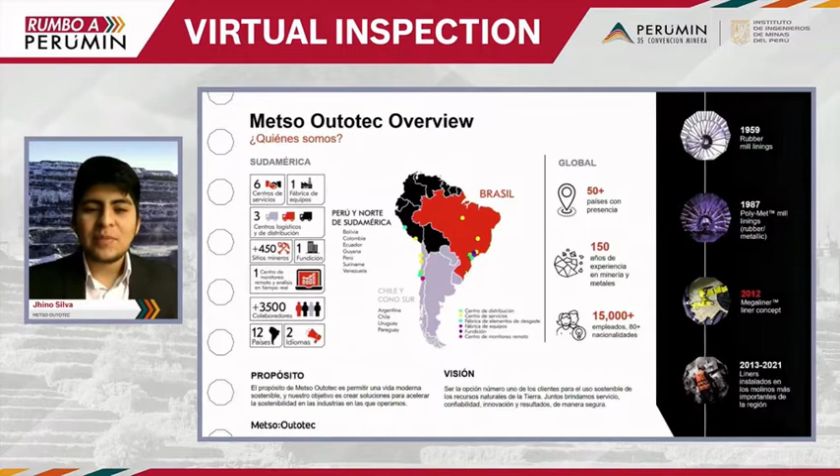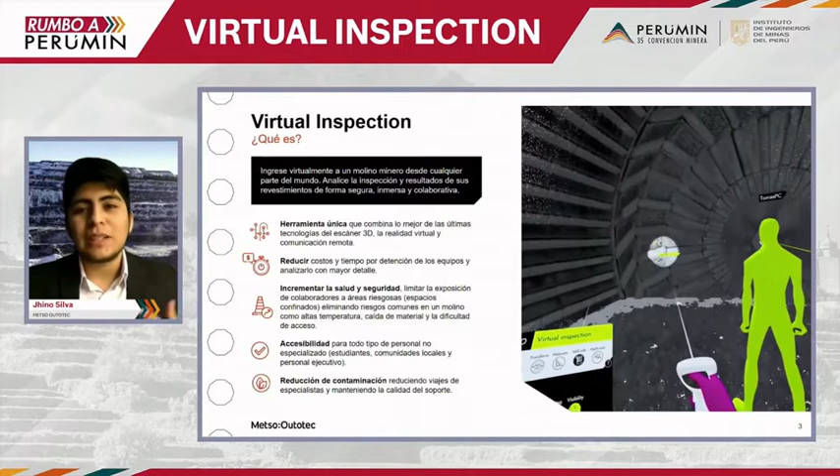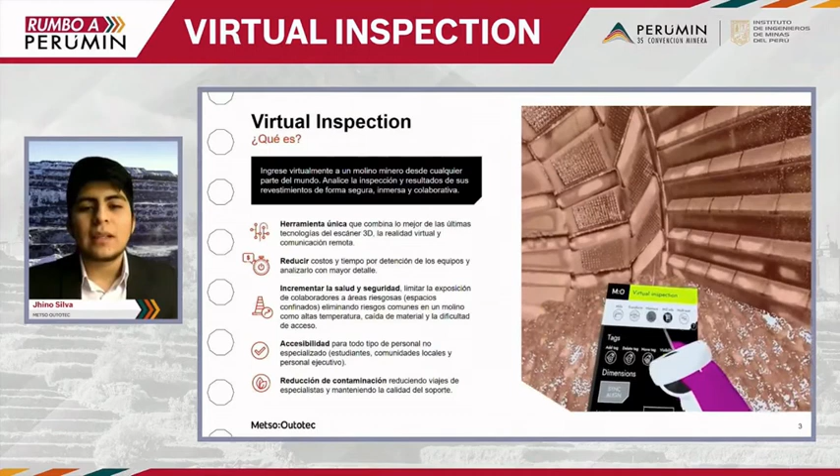Next, please. Now we're going to present to you a new technology, a new solution, which is virtual inspection, which will allow you to enter a mining mill remotely from any part of the world to perform inspection of linings in a secure, safe, immersive, and collaborative way. This combines the best from VR, 3D technology, and remote communication.

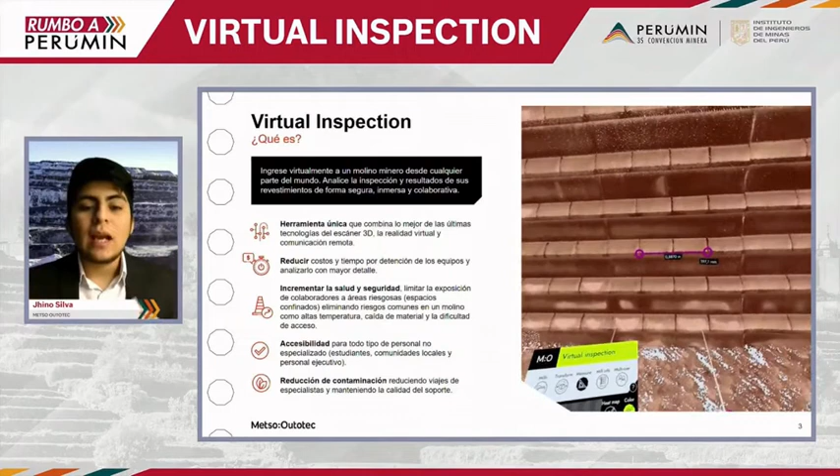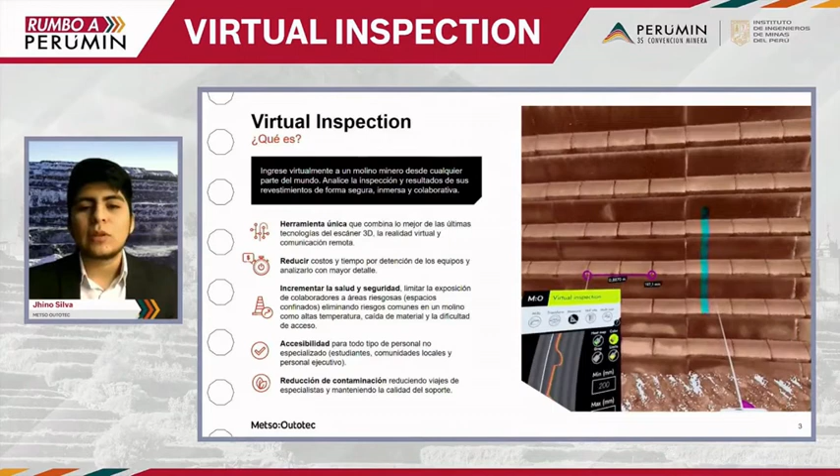So you'll be able to connect with a VR headset to a virtual room where you'll be immersed in a previously scanned mill, as you can see from the video. You'll be able to take measurements and crosscuts, and this also allows other collaborators with their own headsets to join our virtual room. So together, we can analyze the performance of all our linings.

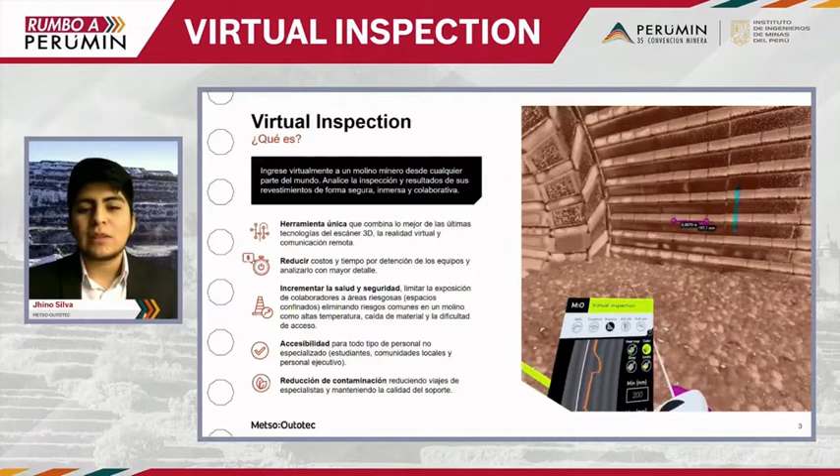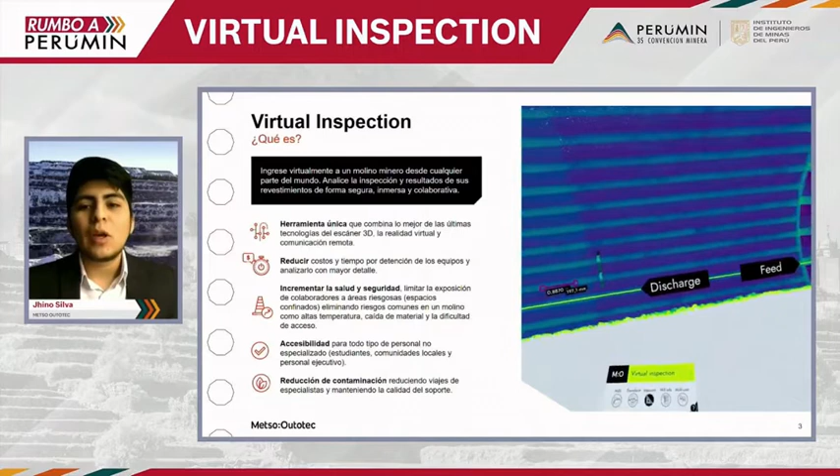So this brings multiple benefits, such as reducing cost and time for stoppage of equipment, where we know that in the region the cost of having a mill stopped is in a range of 20,000 to 150,000 euros per hour. So virtual inspection allows us to reduce costs of this kind of application by 20%,

and it will also allow us to increase health and safety, since we'll be limiting the exposure of our collaborators, and we're aiming for no collaborator to enter to inspect the mill, and later everyone can use a VR headset to perform inspection of the linings remotely and safely.

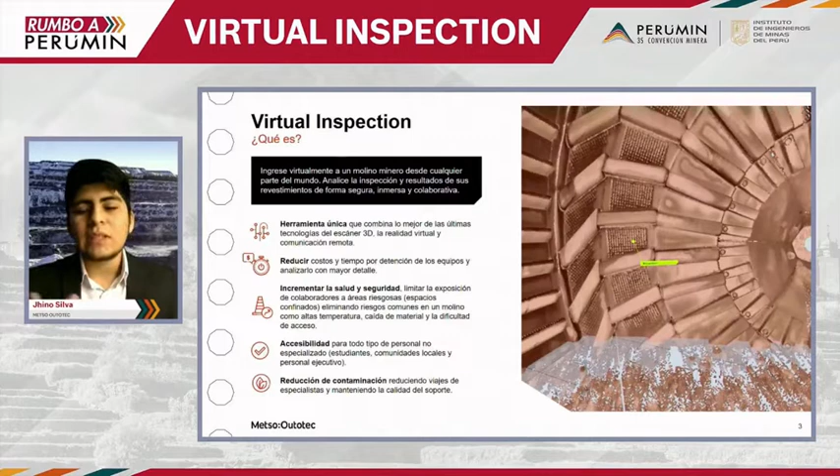This will allow accessibility even for all kinds of non-specialized staff, such as students, local communities, and executive staff, who seek to know what is being done in our mining plant. So this is a very easy and educational tool. We'll also be reducing pollution, since our global specialists will reduce their carbon footprint by avoiding transatlantic travel. Next, please.

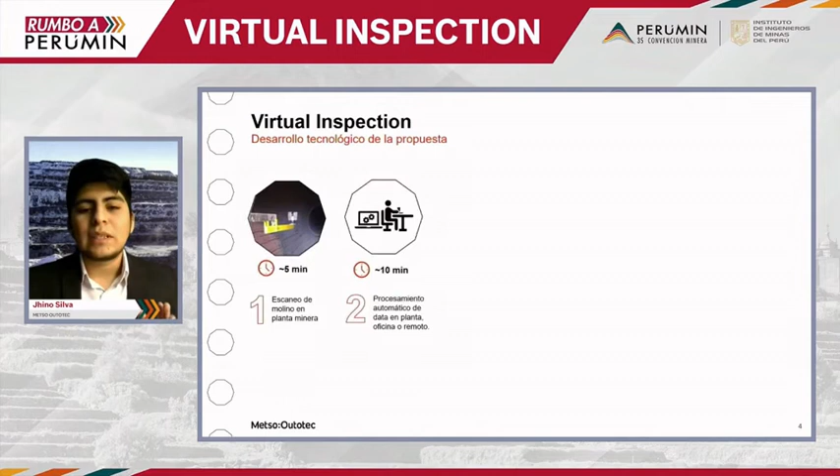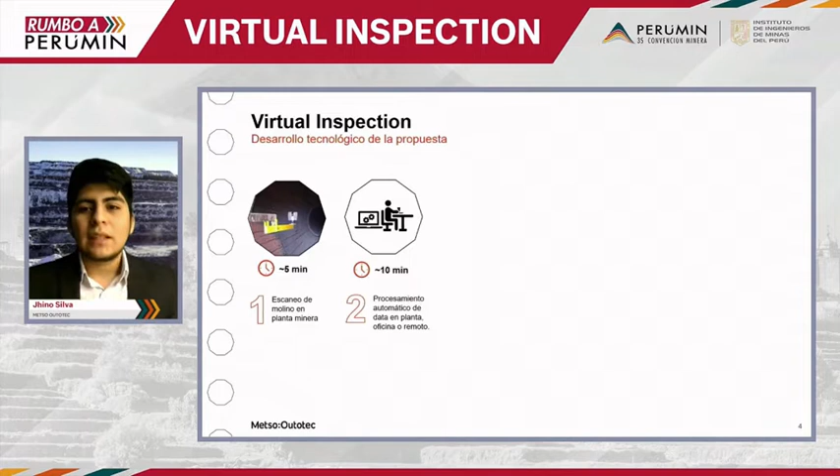As for the technological development of the proposal, we have two main steps. The first is to scan a mill at the mining plant, where we are not seeking to expose any staff. No staff will enter, since via a girder the sensor will be introduced to collect data, and the second step is processing.

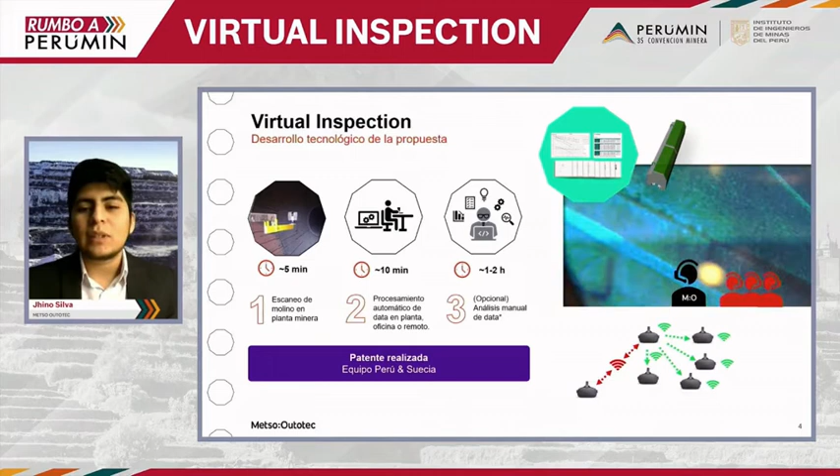There we'll be able to connect remotely, Metso staff as well as customers, in order to see this VR jointly and analyze the performance of our linings. This development is a patent between the Peru and Sweden team that I have the pleasure of belonging to.

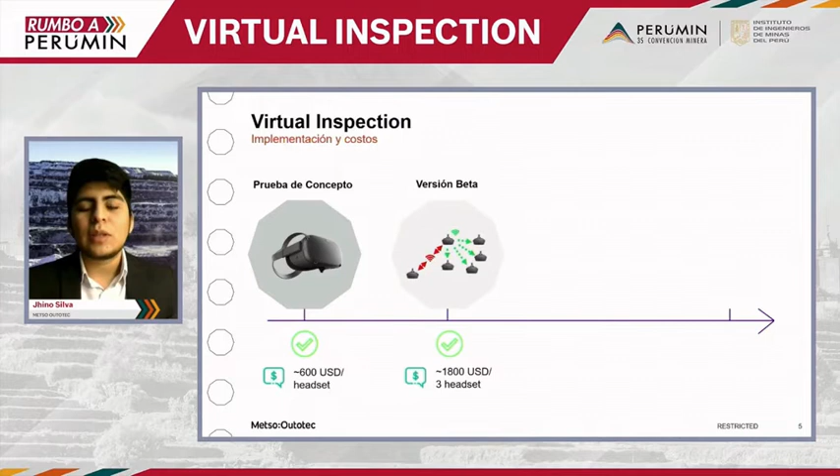So as part of implementation and costs, we have already gone through a concept trial, a beta version, and we are now at the stage of our first deployment, where we're hearing your comments from our mining clients in order to reach the goals that you also need.

In our future versions, to reach this final version, we're going to need some updates and also implementation of the product in the field. So we are calculating around $2,000 per implementation, which includes the cost of the VR headset and a travel allowance.

Once we are at this final version of our product, and it's properly applied and implemented in the market, we'll also be aiming to perform the same activity with other products that we usually scan, such as crusher linings, trucks and transfer devices. This aims to improve time of attention to our products as well, and to expose people less to this kind of risk.